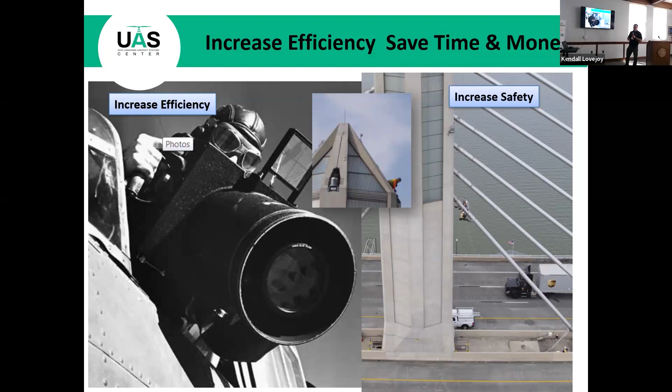Here's a quick glimpse of our flights that we've been doing lately. You can see we've had a pretty big uptick. We're hiring more folks inside the Ohio Department of Transportation - surveyors, bridge inspectors, traffic folks, engineers, construction personnel. So we jumped from 2023 to 2024 by 40% on our operations. We've had a pretty big uptick because a lot of folks are getting used to this technology.

Here's just some more data. I'll just kind of skip over this.

So here's our aircraft fleet. We have 96 drones - they're not all up here, but we use it for aerial photography and GIS, which is mapping, basically. Exterior and interior inspections, so we look at our facilities, our equipment. Our bridges, we fly them inside bridges sometimes - you'd be surprised how big some of these spaces are inside bridges that we inspect. Traffic monitoring is a big one, so we can tie all of our aircraft into the OHGO cameras. You'll see those on the local news, and you drive past on the highway all the time.

We also use them for blind spots. We filled in some blind spots during the eclipse because we were expecting more traffic last year. Communication, promotional videos, our videographers inside ODOT headquarters.

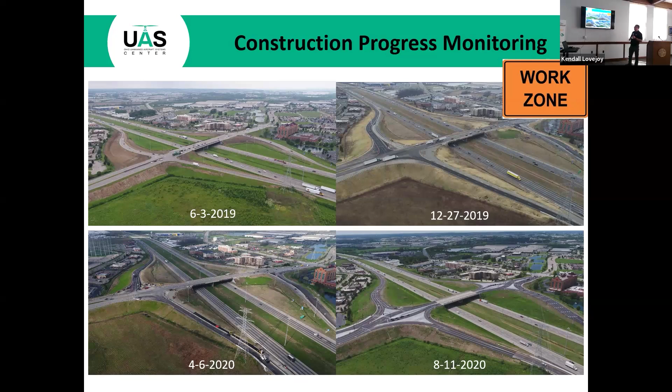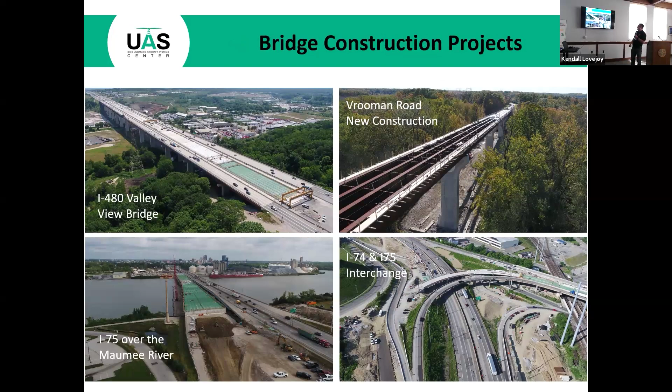Well, you don't think about this too often, but Ohio is almost surrounded by water. We've got the Great Lakes to the north, we have the Ohio River to the south. So we have some 44,000 bridges in Ohio. Ohio Department of Transportation maintains about 12,000 of those, the rest are split up between the county engineers' offices. We've got 88 counties in Ohio, so we kind of split the load on that, but we're always building and maintaining new bridges throughout the state.

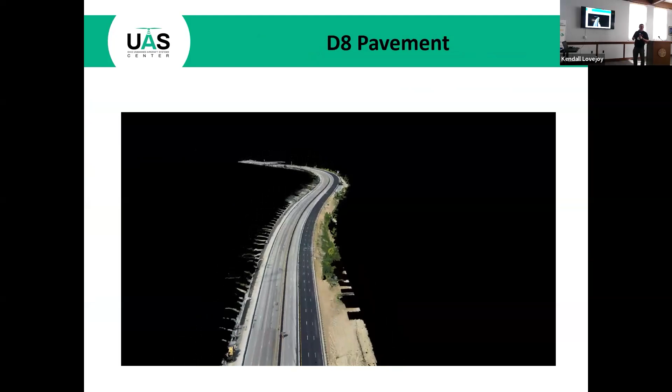So this is a pavement project. I'll let this play here. This is hundreds, maybe even thousands of pictures stitched together. So we can get height measurements, we can get progress, we can see the new pavement going in here. That gives us a snapshot of what's going on, how much work is being done. That's valuable to keeping our projects on time.

So our biggest return on investment is bridge inspections. As I mentioned, we've got a lot of bridges, so we can look at scouring down below, footing detail, cracking, and delamination. Delamination is a fancy word for using thermal technology to see if there's delamination in the concrete. Traditional methods are just dragging a chain behind a truck and recording sounds. The sound will change, and especially if it rains and starts heating up in the morning, we can get high readings and see where there's cracking on the bridge deck. So that's very helpful to us.

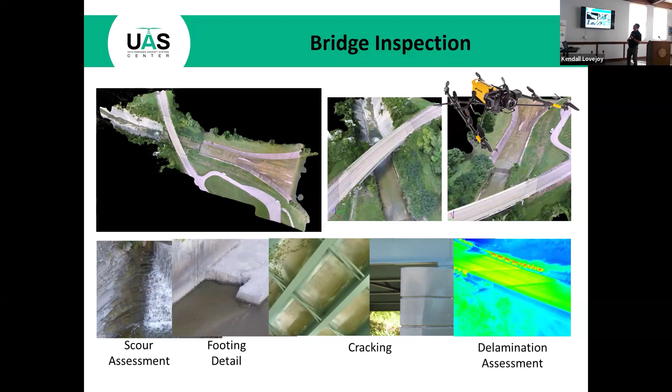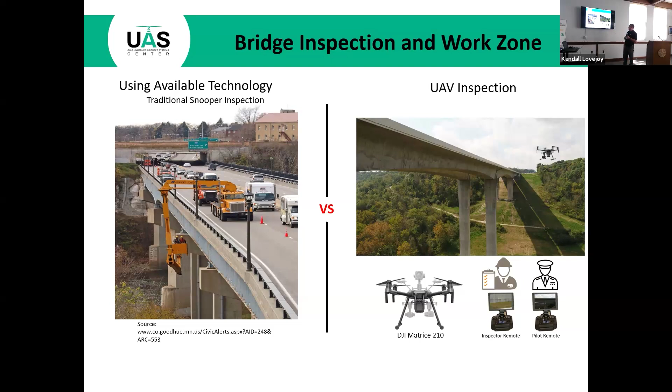Traditional methods use a snooper, which is basically a big bucket truck. You can see it here. Sometimes we have to use it for extra critical bridges, but when we don't have to, we can augment it with a drone. You can see we have to shut down lanes here, which is a safety hazard for motorists and inevitably causes accidents. But if you can use a drone to do the same job, motorists will never know it's there. You can usually use two operators instead of the 6 people required to operate the snooper trucks.

So as I mentioned, it's our biggest return on investment. We can save the state a lot of money. We can take the manpower out of there and operate more safely and efficiently by using this technology.

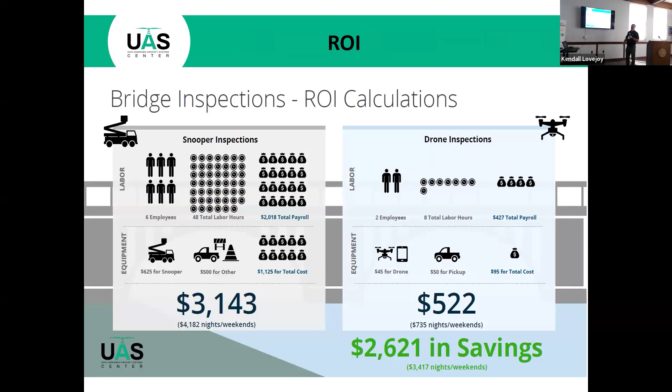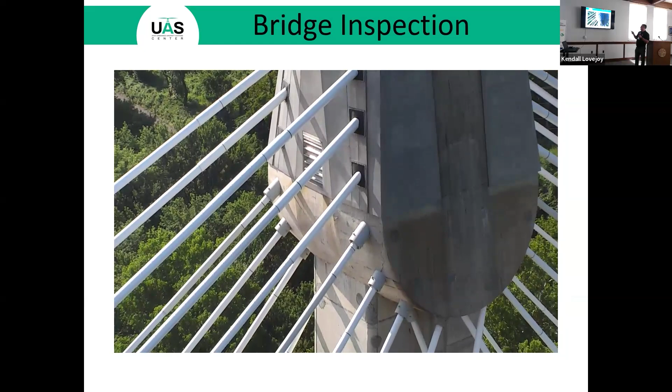This really illustrates how the aircraft work and the level of efficiency we can achieve. I believe this is the Ironton-Russell Bridge on the Ohio River. There was a crack there that they filled with mortar, so they go back once a year to take a look at it. Traditionally, you'd have to have someone climb up the hatch, go to the top, then rappel down to take a look. But we can take an aircraft out of a box, power it on, fly it, and determine that the mortar is still holding. So we keep an eye on that with many other bridges like this across the state.

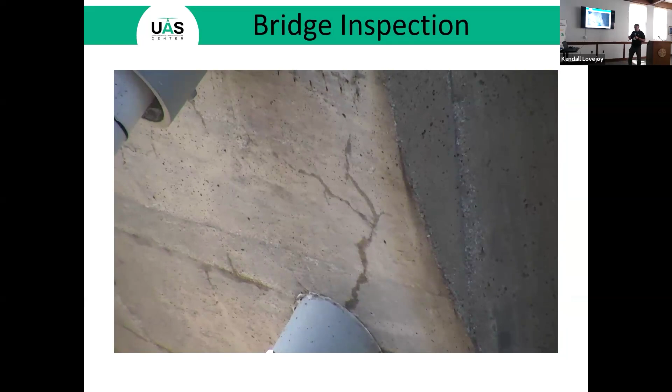Emergency shutdowns happen quite a bit. This one was a few years back, a semi carrying potassium hydroxide jackknifed on the Brent Spence Bridge. If you've ever gone down to Florida, Tennessee, Texas, or anywhere crossing that way, you know how bad it is crossing that bridge.

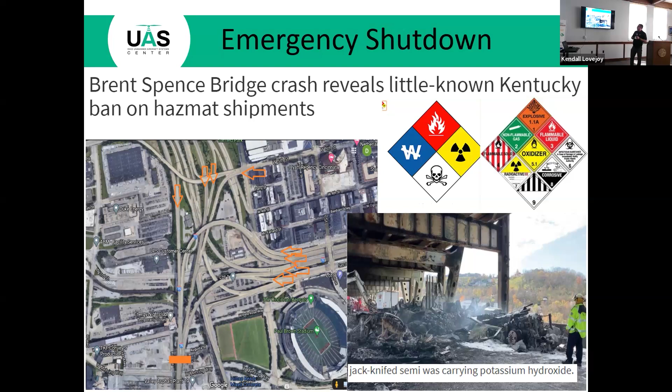So we got a twofer out of this one. We were able to do damage assessment of the bridge, and we were also able to move and direct traffic on the other existing bridges to have it flow better. Back in November, I think it was the Big Mac Bridge that caught on fire, so we assessed that one as well. Emergency shutdowns are becoming more common for us.

Natural disasters, as I already mentioned - we're getting into the rainy season here in Ohio, so we have a lot of washouts. We can measure the amount of damage, assess it, and get a snapshot of how long it's going to take and how much material we need to fill it back in.

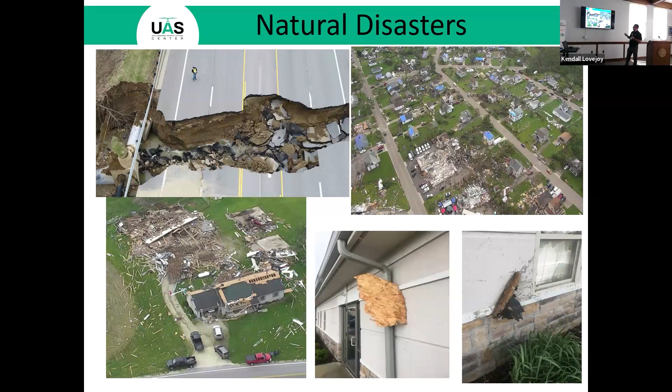Tornadoes are another one that we do quite a bit - I've already mentioned that one. Flooding's another one. Obviously, if there's water on the roads, that's going to be a problem for us. So we'll look at ways we can put in new drainage, new drainage tiles, and new culverts, and try to make the water flow away from the roads for future projects.

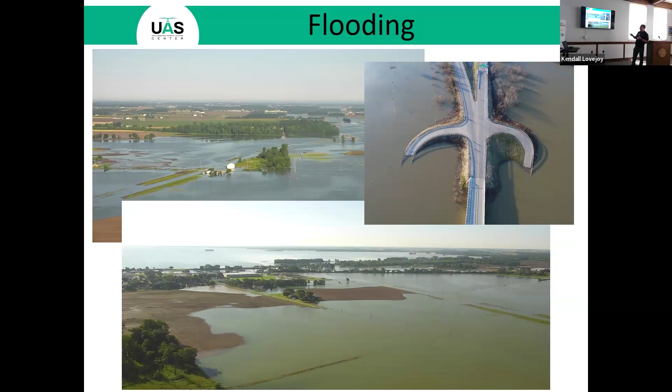Another thing we look at is landslides. Rainy seasons cause this, and also a phenomenon called windjacking, where trees grow out of the side of the mountain or hill, and the wind blows them and loosens the material. So we're actually looking at vegetation spraying - when those are seedlings, we can spray them. There's a certain type of tree that grows out of that we always keep an eye on. Here's just more washout stuff.

I mentioned before, traffic's a big one. You can't see it well in this picture, but this is traffic building up on a freeway, and you can really get that bird's eye view of traffic. For this particular one, the signal lights weren't timed correctly. So we can look at all the traffic flows, give this data to our traffic engineers, and they can say, we have a problem with this light, or maybe all three of them.

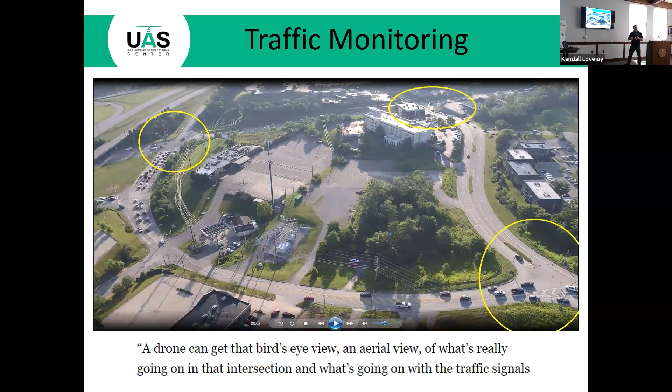So we can move traffic away from the freeway and have it move freer. Another one is school zones. This is in Springboro, Ohio, a 2-lane road, 741, if you're familiar with that road. We flew 6 aircraft at once, and we were able to speed up the time that folks flow during rush hour by 26%. Doesn't seem like a lot, but for the folks traveling through that every day, 26% was helpful, so they were appreciative of that.

Another one we did during the pandemic was the mass vaccination sites. They had them in Cleveland, so we worked with Ohio National Guard and FEMA. The NFL draft was going on at the same time, so there were a lot more folks in the Cleveland area than normal. We had parking as an issue, we had traffic as an issue, so we were monitoring all the activity along with that.

Here's another one too, during the pandemic. This is in Cincinnati. Typically, folks would walk through this light show, but during the pandemic, people were just driving through it. So we had a lot of traffic building up on the freeway at night. That's even more hazardous when you've got accidents at night. So we were monitoring this pretty close, but this was our first night flights before the FAA changed the rules on night flights. That was at the time a big accomplishment for us.

Here's our camera system here. Let's see if this was the Jeremiah Morrow Bridge. They imploded this a few years ago, and we monitored that activity.

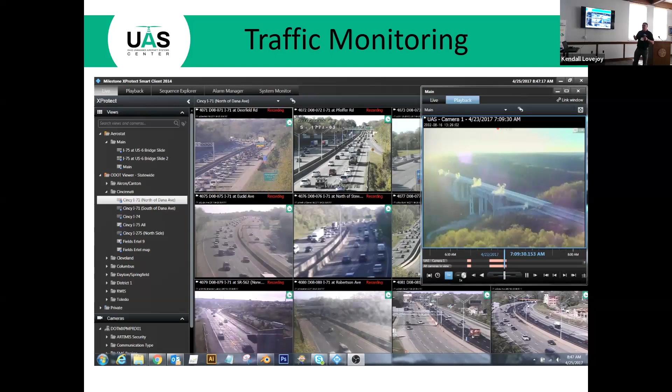We're also doing a big scan with this bridge. We're going to use 150,000 photos to do what they call digital twins. We're getting crack technology. For whatever reason, this bridge is starting to crack faster than it should. So we can capture the bridge in real time, then compare models of the future to see what the level of cracking is and repair it as we go along. That will speed up the process and ultimately make the bridge safer, more efficient as we move forward.

So we had clunky boxes we'd feed into our pole camera systems. Now we can stream everything through iPhones, through an app. So that was a kind of a big technology leap for us. So we can respond to natural disasters and things of that nature in real time. And we have a QR code we can send the folks, and they can pull it up. As long as they have an internet connection, they can watch it anywhere in the state.

So all the stuff I kind of showed you before is a lot of just pictures and videos, and pictures worth 1,000 words, which is true. But we're actually using science and mathematics to measure. This is a new on and off ramp going on. So we can get high level accuracies.

We have a VRS CORS system. We can tie our aircraft in there. So we can get the X and Y, which is forward, backwards, right, left. Then we tie them with Z, which is the altitude. So we get ground control points. We can stitch everything together and get high measurement as far as doing new construction. That's important to us because if your measurement's off, it could cost the state and the taxpayer hundreds of thousands of dollars in material, gravel, base layers, stuff like that.

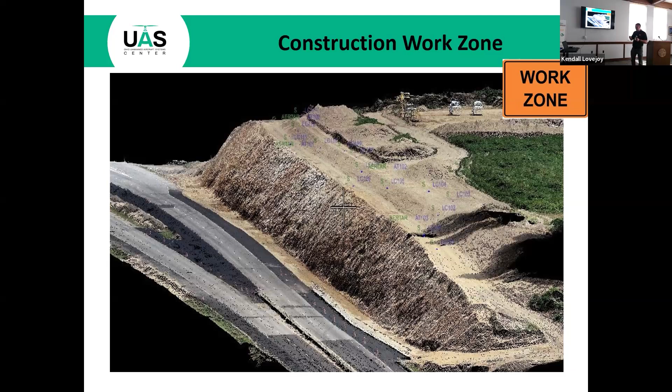So here's another one too. This was actually the same project. We were able to, this was the wall surface here, and we moved it back to here. So we were able to get high levels of rubble removal. That's important to us because our contractors will hire them to pull the material away from that, and they charge by the truckload. So we can actually get more accurate levels of rubble removal from our projects. That's important to us because the rock wall decompacts, so the vendors can charge the state more money. So we're kind of keeping them a little more honest with this. That's been helpful to us.

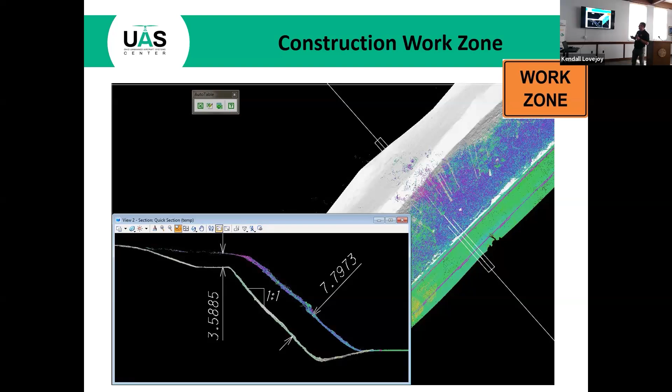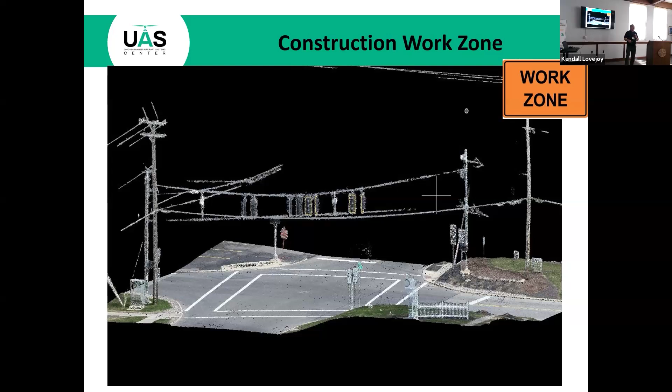Here's another one too. So these are the stringer arms at intersections. Now they're putting all the big mast, the big heavy steel mast over that. Traditional methods for measuring everything, when you're putting a new intersection, you have to measure everything here. They would typically do that by just putting up a big pole and measuring everything like that. It's very time consuming. It also could be hazardous to our workers because they're close to active traffic. But by just using a drone, we can measure everything in this picture, and our designers can go back to this day after day instead of going out there and measuring everything. It's like virtual reality at your fingertips, at your computer at your work, so they can do their job more efficiently.

Here's some more sensors that we do. This one up here is at Grand Lake St. Mary's. So in the 1800s, late 1800s, everyone was drilling for oil. If you're farmers, you probably see these casings in your fields sometimes. So we're working with the Ohio Department of Natural Resources to identify these across the state. All these little blips here are wellheads, big steel casings that go sometimes thousands of feet into the ground. We're using basically a big metal detector underneath the drone, so we're able to detect these wells in farmers' fields and over these lakes here. That was the first offshore drilling anywhere in the world.

This is a LiDAR unit. So the Indiana bat is an endangered species. We have an environmental group at ODOT that's been tracking these bats, trying to get them off the endangered species list. This is an old abandoned railroad tunnel, and for whatever reason, these bats were thriving here. So they wanted to look at the vegetation and the cave structure to see why these bats thrive in this particular area.

This is ground penetrating radar. We can see drainage tiles, septic tanks, grave sites. This is important to us because if we're expanding a road, sometimes we get close to drainage tiles and other things under the ground that we can take a look at.

This is actually a bat tracking program that we're working with Ohio State University on, the same type of species of bat.

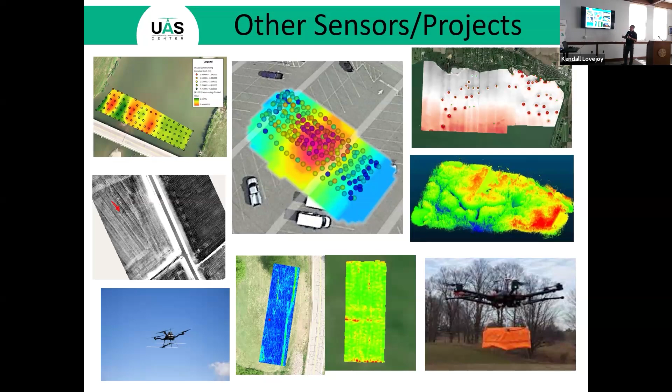This was a project for the Ohio EPA. Basically, this was a company that went out of business. That's all old homes that they put in a big debris pile. This picture doesn't do it justice, it was about 3 stories high. It cost the state $10 million to clean up, so we did a volume calculation in order to figure out that number.

This is just more 3D model work.

We moved our office. This is probably good information for you. We're not at... yeah, okay. So this is the Springfield Airport that we're at right now. I'll show you another slide coming up about this. There's something kind of exciting happening today and next week there.

Here's a new technology too. We're getting some of these docking stations. So the Brent Spence Bridge, as I mentioned before, is really congested over the Ohio River. If you've ever gone on vacation in the South, you've probably encountered that. We're working with Kentucky DOT, and we're going to put a couple of these boxes down there so we can monitor the traffic and the construction process. I think this is going to be the nation's largest construction project ever, like $8 billion to build this new companion bridge. So we're going to be monitoring a lot of stuff going on down in the Cincinnati area with these boxes. They're self-contained, and we can operate them from our desks.

This is kind of the new wave of the future. We've got a remote operations center at our headquarters, so we can sit in front of the computer and actually fly these remotely from thousands of miles away. I'll show you a slide here about that as well.

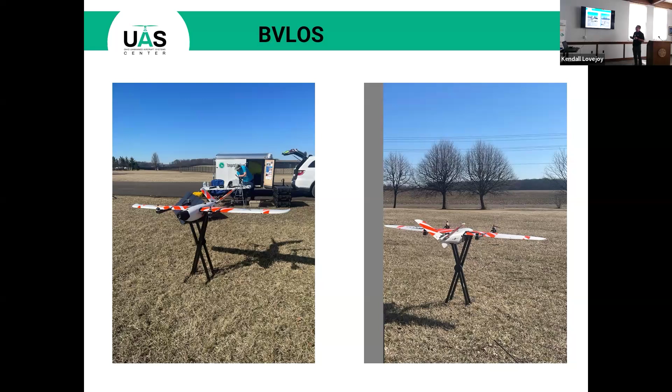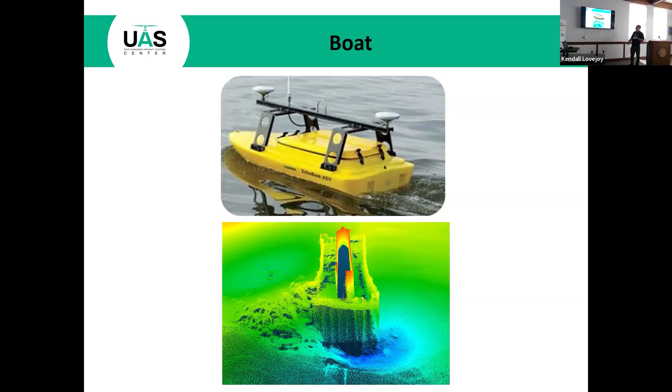With traditional methods, our bridge inspectors will wade in the water and use a big metal rod to measure the depth. This is a way we can do it with higher precision, more accurately getting the results we need to ascertain if this bridge needs to be repaired or not.

Everything I showed you before was all of our operational stuff, how we're implementing this technology inside the Department of Transportation operations. We're also working with companies and the Air Force Research Laboratory, based out of Wright-Patterson Air Force Base, in an initiative called Fly Ohio.

There are two types of air traffic. One is called cooperative—those are the folks using ADS-B and transponders. Everyone's at least heard of a transponder, so the FAA knows where people are in real time with a transponder or ADS-B device. But there are still some folks flying canvas airplanes with no electrical system, so we just see them with radar. We can see both cooperative and uncooperative aircraft.

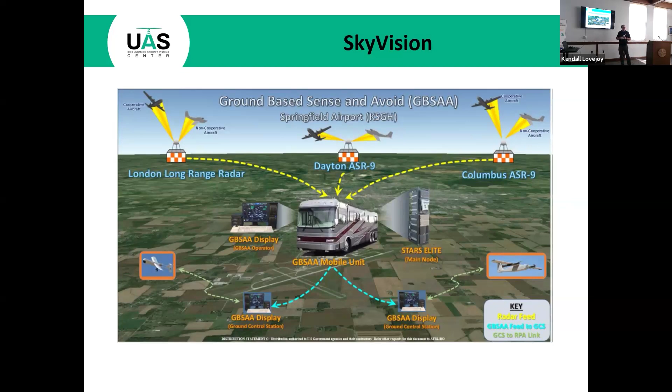We've got operators on the ground flying various aircraft for experimental purposes, so we can deconflict traffic or warn them if there's manned air traffic coming into the airport.

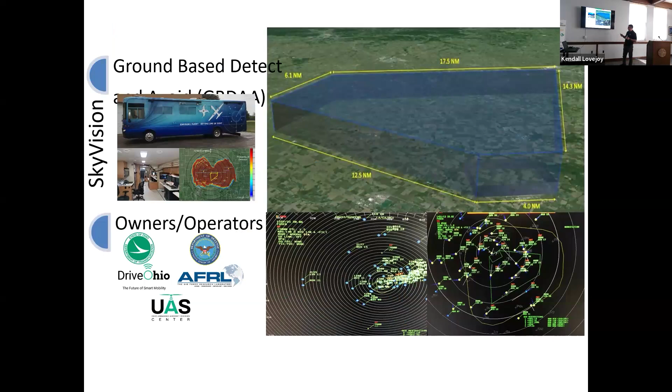This is just a live picture of it—I won't let this play all the way through, just a minute or two. We've got two former air traffic controllers who sit in there, and we work with the Air Force Research Laboratory when they're testing new devices and sensors. They don't have to drive out to the Western test ranges or fly out there; they can come to Springfield, test their devices, and go back and tweak it as needed. This is happening today and next week.

Here's an MQ-9 Reaper. These are the hunter-killer aircraft that our service members use to hunt the bad guys. In Springfield, they have a National Guard base with two ground control stations, and they'll fly these aircraft over in theater in the Middle East, launching and recovering from bases there. Then they hand the aircraft over to the folks in Springfield, and they'll fly these.

So that SkyVision radar system allowed these aircraft to come in from California, because we can see all the air traffic, and these guys can practice their launch and recovery right at Springfield with this radar system.

So we can bring them, spiral them down safely from 20,000 feet and have them land on the aircraft runway here. So here's some proposed things going on. The green areas are our operational area here. These are military operation areas.